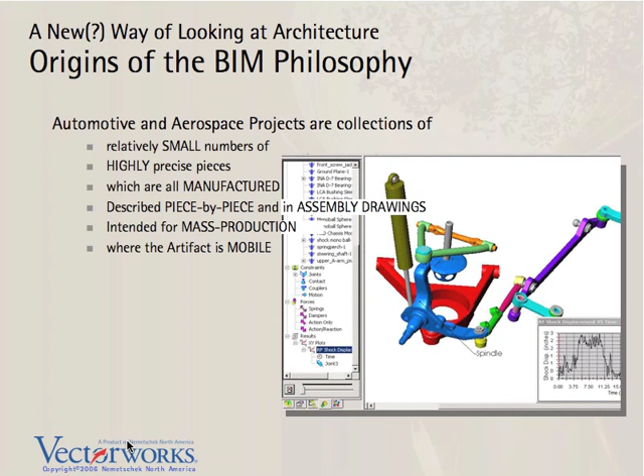Obviously, they're intended to be unique, and they're constructed in a single location, so the artifact is not mobile. The point of use and the point of creation are the same. So how could a building be more different from an automotive or aerospace project? If the entire cultural context is different, it makes sense a little bit that the process could be different.

So why are we adapting these processes to our work? And I'm not saying it's wrong, but I want to raise the question and get you to think about the process a little bit as well.

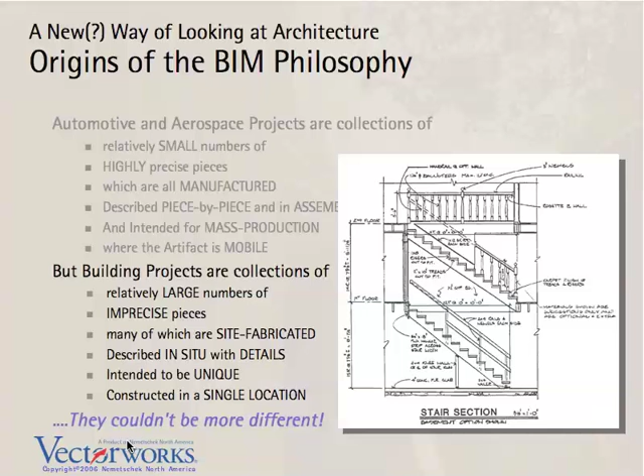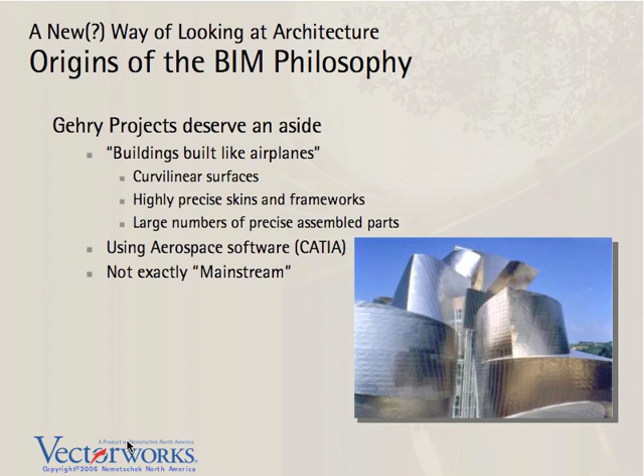I will say that Frank Gehry deserves an aside. In effect, he's got buildings that are built like airplanes with these beautiful, smooth, curvilinear skins, very precise. And so he builds buildings that look like airplanes, and he uses airplane software, which is CATIA, to handle the production and manufacture of his skins, the frameworks that support his skins, and the HVAC that sits inside that framework. It's a beautiful process so far as it goes, but it's not exactly mainstream.

I think it's worth asking the question, can buildings be manufactured? What if we change the process a little bit? This book, Refabricating Architecture, was given to me as a homework assignment by my boss at the end of last year. It's written by Stephen Kieran and Jim Timberlake, both FAIA. Really an interesting book wherein they propose using these automotive and aerospace techniques for buildings, delivering buildings to the site in much bigger pieces with fewer but much more complex joints.

Getting all the trades under one roof, controlling quality, and centralizing the actual location of manufacture - but I don't think it's realistic. Personally, I think their position is weakened by the pieces of architecture and construction they choose to ignore, particularly modern home builders who've taken extraordinary methods to drive costs out of construction. They don't account for the cost of uniqueness or the capital costs of building the actual factories. So I think they ignore home building because of a modernist bias, and ultimately the book is a bit of a polemic. But it's an interesting book, worth reading, and I can highly recommend it.

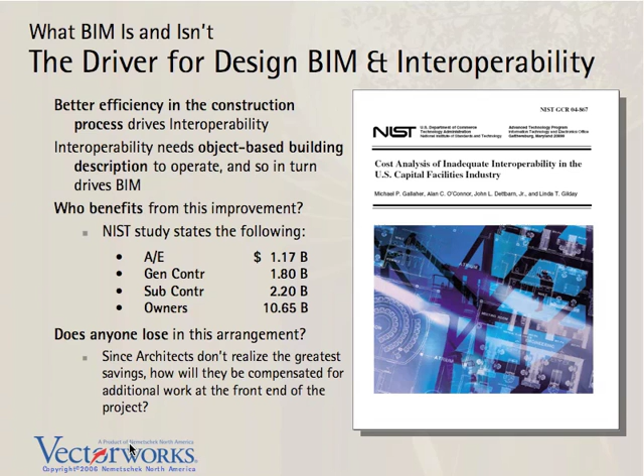Before we go much further, let's talk about a working definition of design BIM. This is that better CAD, that technology that sits on your desktop.

So what is it? Well, projects are developed with an integrated, unified 2D and 3D model. I say 2D and 3D because you can model in 2D every bit as much as you can model in 3D. In fact, you have to have 2D and 3D held together, or integrated.

Think of the way you draw a wall outlet, a duplex outlet. In plan, you just draw it as a circle with two slashes, but in 3D it's a nondescript 2 by 2 by 4 inch box recessed into the wall. If you used strict 3D drawing to represent that in all views, it would be very difficult to interpret what you need to communicate. So 2D as well as 3D are important, and this is a topic we'll come back to.

So the first aspect is this 2D, 3D model. The second aspect is that all the parts of your building are described with objects, drawn as property-bearing objects, not just geometry.

Third aspect is that the various views of this model are going to produce your drawing. So when you make changes to the model, they're automatically reflected in all views, giving you automatic drawing coordination.

That's a nice thing. And the last aspect is that the components, these model objects, possess graphical as well as non-graphical properties. They obviously know something about their quantities, their costs. They might possess information about thermal or acoustic properties, or other scheduling information. Some people call this the 'I' of BIM, the information component. These non-graphical properties are extremely important.

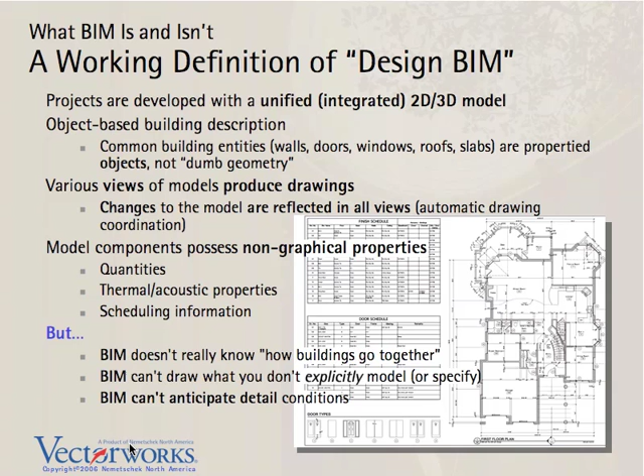It has some advantages. Some things are easier to model than to draw. A spiral staircase is the classic example. In 3D, it's not too complicated - it's a block, and you just step it and rotate it a little bit, and voila, you have a spiral staircase. But if you've ever tried to elevate one in 2D, you know it can be kind of a bear. So it's nice to have this thing you can model easily and have the system draw for you.

And BIM, because of its model-centric nature, does a very good job of coordinating drawings, from the overview to the details, as well as between plan views and vertical views, elevations and interior elevations, etc. In addition, the automatic scheduling is really a boon - it's a natural fit for BIM and all this non-graphical data it's managing in its database for you.

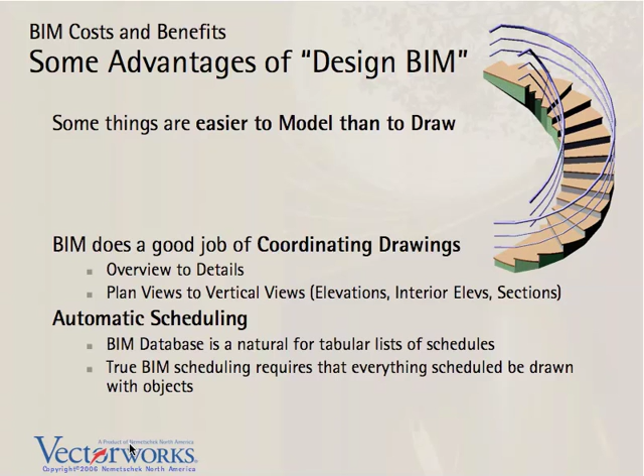So drawing and graphics will still be important to the BIM workflow, and BIM software that requires a separate application can be costly because it can require you to learn and buy a second program. ArchiCAD requires you to also learn PlotMaker. Revit is still recommending that you incorporate AutoCAD for your graphical needs.

It's also worth noting that some BIM software can be very compute intensive, a hog as we say. Sometimes parametric constraints and ubiquitous solids can be relatively sluggish, and it's hard for the software to keep up with the flow of ideas as the designer is drawing and manipulating his model. So evaluate your BIM software on this aspect as well, because they will chew up all the computing power you throw at it, and more.

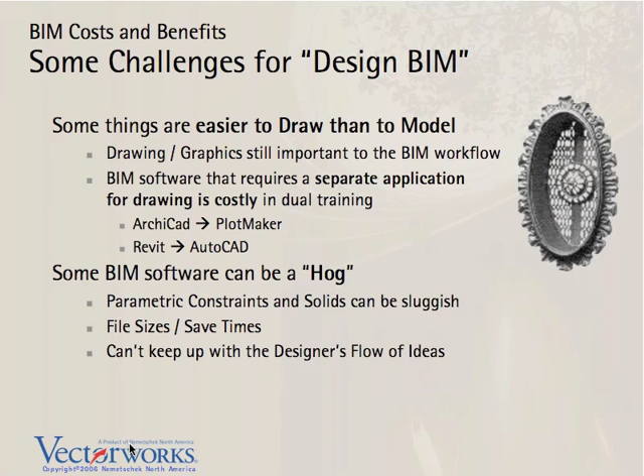I'd like to talk for a minute about BIM and the office culture, and a little bit about the culture of technology in architects' offices in general. If we look at what's happened and where we are today, we can say that CAD has created a two-tier culture at some firms. I call this the virtuoso problem.

If you've ever seen a really good AutoCAD jock, and I know many of your offices are based on AutoCAD, it seems to me like the really fast AutoCAD guys have learned the command line. So when you watch them, they're really quite something to watch. Their left hand is typing away at the keyboard, their right hand is mousing, and the display is zooming in and out. It's really kind of an interesting eye-hand coordination issue.

But the problem is that these AutoCAD jocks add so much value to the firms where they work as electronic pencil pushers that it's difficult to justify sending them out to the site, getting them to do some real construction observation, and getting them to understand how buildings go together. They've sort of created a glass ceiling for themselves because of the value they add as this electronic pencil pusher.

That's a problem in and of itself relating to intern development, but BIM requires architectural and construction knowledge. So how will interns learn how buildings go together? And if I've got to have people who really are truly architects and fewer just drafters, will offices become top-heavy?

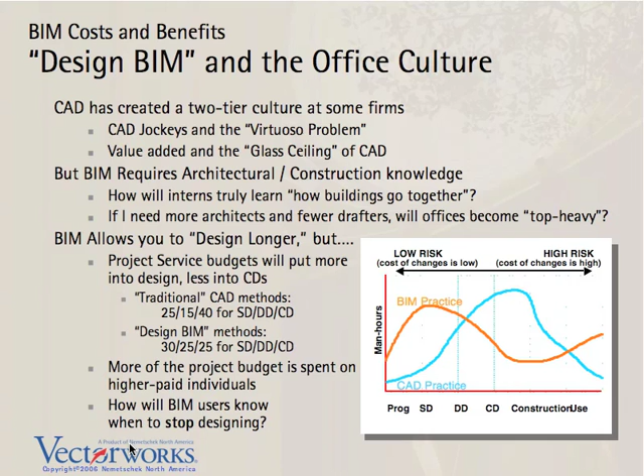So let's look at the actual architectural workflow and see where design BIM fits into it. I like to think of architectural design as a 3-stage process. I think of it as the 3 C's: conceptualize, construct, and communicate.

Conceptualize, or conceptualization, is the sort of intellectual heavy lifting of the project. It's where you actually figure out what the project is going to be. You're thinking, you're sketching, you're going out to the site, you're taking photographs, you're looking at iconography, you're trying to decide what's the imagery you're going to use or base this on. It's where the project really moves from that idea, that good idea Bruce Goff was talking about, into something that becomes a building.

The construct part is, I think, probably more the same for most people. Essentially, we're creating and developing architectural views of the project. You're drawing plans, you're creating a building model, you're extracting views, you might be analyzing and looking at different quantity and cost issues or energy consumption issues. But it's where you've taken that good idea and turned it into an actual building, and at some point you have some form of building model at the center of it all.

Communicate is where you take that and turn it into drawings, and you enhance the drawings. You add graphics, and you dimension and annotate. You lay out your sheets, you write specs. You prepare that architectural reality that you've created, that you've constructed, and you prepare it for talking to the rest of the world. Particularly, you want to refine the view so that the builder can understand what your intent is and build from it. So the 3 C's: conceptualize, construct, communicate.

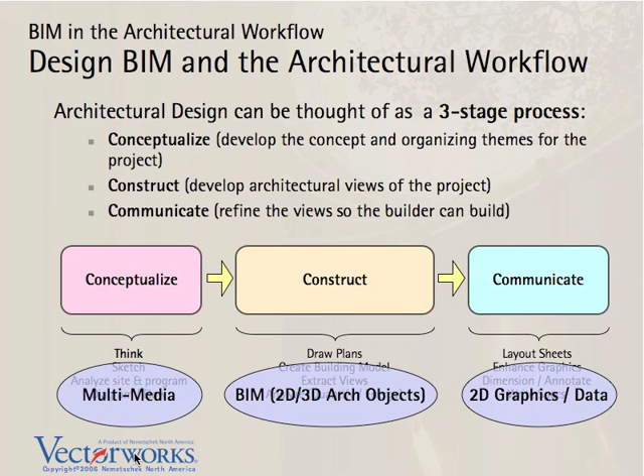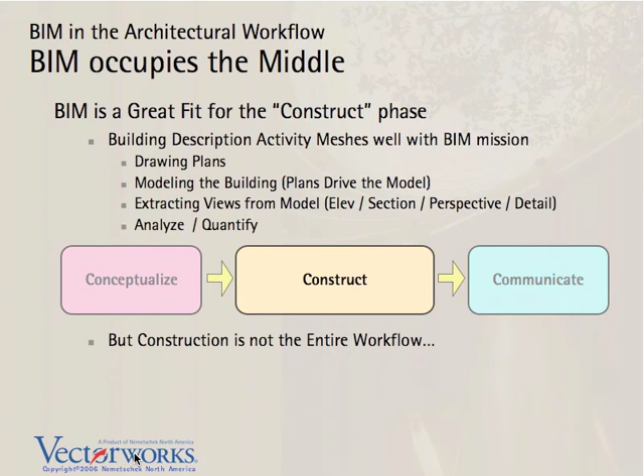If we look ahead at the early parts of the design, one of the things you really want is sketching. Sketching is still important - it's a form of thinking. Sometimes think of sketching as this communication between the designer's conscious and his subconscious mind. And BIM needs the ability to capture these sketches, bring it into the construction phase.

So what you need is two things. You need integrated tools for specialized front-end thinking, like maybe site analysis, space planning kind of tools. But you also need funneling tools that will allow you to capture media from other sources into BIM. This could be images, could be 3D files of various forms, and tools to transform these abstract shapes into actual BIM objects.

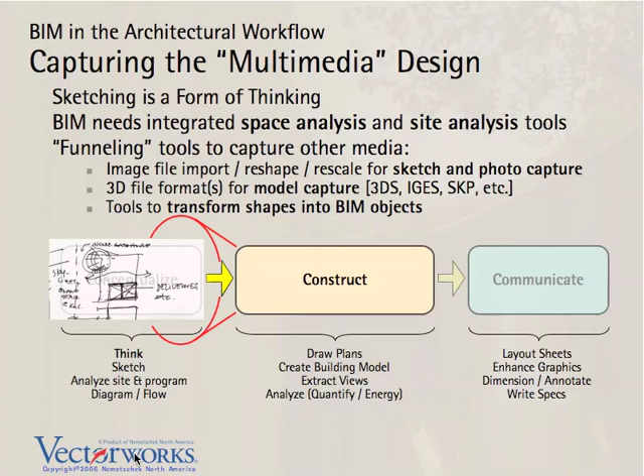At the back end, of course, you need the ability to create readability in your projects. And at the lower left, for example, is an elevational view of a project - perfectly accurate, perfectly correct, and also, frankly, perfectly flat. And you want to be able to enhance those views.

As I often tell people, a lot of the BIM pundits who talk about BIM sometimes say things like, 'finally we're going to be rid of drawings.' With a model at the center of the process, we're going to be rid of drawings, and they act like that's a good thing. We spent 500 years since the Renaissance refining our graphical communications and the agreed upon methods that we use to communicate. And I wonder why the BIM pundits all think that getting rid of drawings is a good idea.

I'm not so sure. I wonder if maybe they got stuck in the back room doing stair details for a little bit too long. But in any case, I like my drawings to read, and I know that this graphical communication is still an integrated and very important part of architecture.

So at the back end, I think we still need the ability to take these views that the BIM creates and add line weight, and begin to do things like texturing and stippling and adding sketchiness if you want to do preliminary type work, and certainly add dimensions and annotations as necessary. There's a lot at the back end that really has to be done on top to get the whole project to read for communication to the client as well as to the contractor.

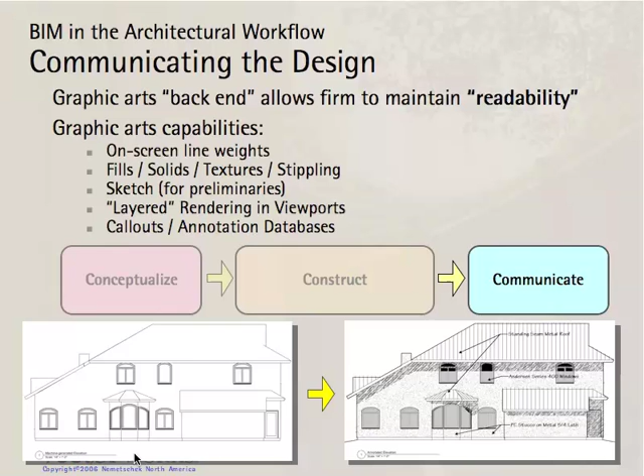Sometimes the vocabulary provided in those BIM objects can be somewhat banal. So BIM should have the ability to take an arbitrary collection of 3D freeform tools and take the geometry that they create, interact them with the standard BIM geometries, and also attach BIM style information, data, or schedule information to a geometric object. That's the Calatrava project there from the 2004 Olympics, the Nations Wall.

It's a wall, but it's not a wall you'd find in any BIM program. And I think that we need to remember that sometimes you need that pure geometry that you can then bring into the BIM world.

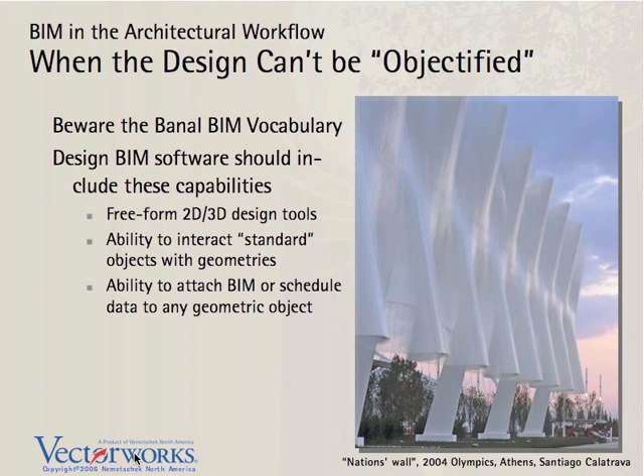So I've given this talk all over the country, and I'm reminded by my marketing people, since they foot the bill, that this needs to have some marketing content. And I tell them, this is really more of an educational talk. And they say, no, Robert, you gotta go out there and sell. So this is my one marketing slide.

I call it Buyer's Guide for BIM. Most of the time I'm talking to medium to small size firms, let's say 20 people offices and smaller. And when I say they need versatility in the software, they begin to nod their heads and agree. So there are really two major overriding issues.

One is that your BIM package should support the entire architectural workflow, the entire 3 C's: conceptualize, construct, and communicate. You want tools to develop that conceptual design, space planning, site modeling, and funneling tools. You want the object-oriented tools in the middle for construction, and the integrated bill of materials that can read that model-based, object-based design. And at the back end, you need good graphic arts capability to handle the communication part. That's one aspect of it.

The second aspect is to look for something that promotes workflow flexibility. In other words, the people in your office have different skills and different experiences, and you should be able to let people just do a drawing. If all they need to be able to do is draw, let them draw. If they want to model, let them model. Give the really advanced guys the ability to do abstract, 3D design.

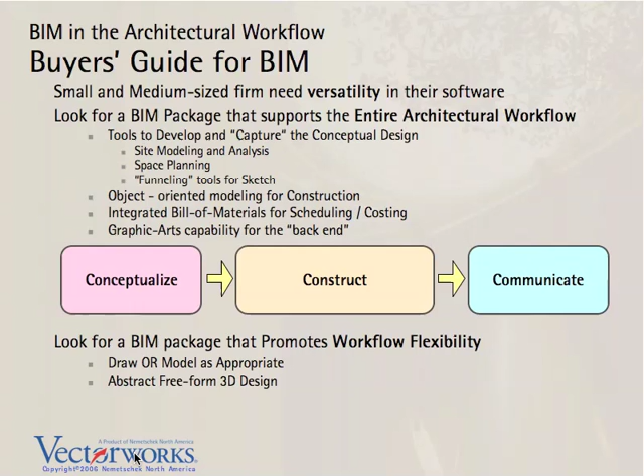In the last section of this talk, I want to prognosticate a little bit and talk about what's going to happen over the course of the next 10 to 15 years in the construction industry. In particular, I want to see how BIM and interoperability will change the workflow.

I want to start by saying that in the short to medium term, by which I mean the 5 to 10 year range, particularly for medium to average size architectural and construction projects, I don't see the role of drawings diminishing. I think physical paper may turn into PDF, we may have electronic viewers, but they better be pretty lightweight and portable so they can be used, and pretty tough so they can be used on the site.

So I think getting rid of paper may be a good thing. I mean, I think we may need the trees to turn carbon dioxide back into oxygen, if you know what I mean. But I don't see drawings per se going away, although they will become electronic.

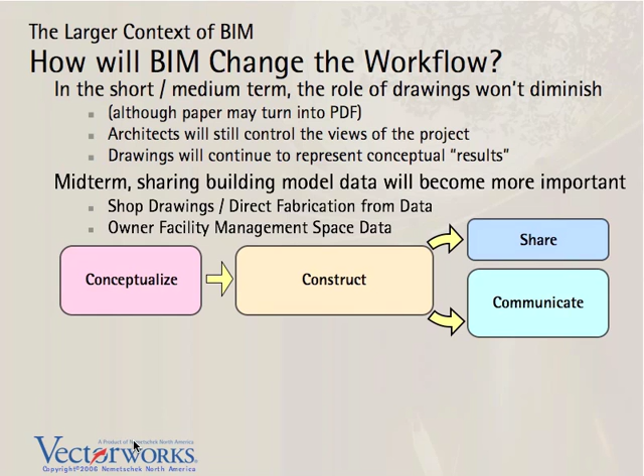Ultimately, sharing is going to take on the lion's share of the whole role for construction. And I say ultimately because we're really not there yet. There are several issues that have to really be worked out. We have to have a lot more wholehearted interoperability support by software vendors, such as my own company.

The BIM software itself will have to become more inferential, such that it can create a more complete model from architectural directions given it by the architect, for it to be as complete as is necessary. And we're also going to have to create model browsers that can communicate as well as our 500-year post-Renaissance drawing language.

One of the contradictions about models is people tend to think that models are easier to understand than drawings are, and I think if they're physical models, they are. But when projected on the screen, models tend to be wireframe, and wireframe models show everything, but can be very difficult to resolve visually. And once you render them to make them easy to resolve visually, then things that are inside them tend to be hidden.

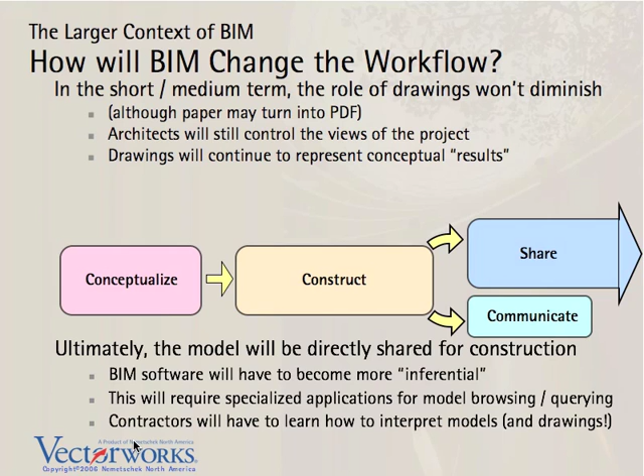So there's this inherent contradiction in showing a model on a screen, and contractors are going to have to learn how to interpret models the way they've learned how to interpret drawings—or some of you may say the way they haven't learned to interpret drawings, because they don't look at them. They're still going to have to look at the models, and there's going to have to be this shared agreement about what constitutes this communication process. But it's going to be happening on a new medium, so we have things to learn all over again.

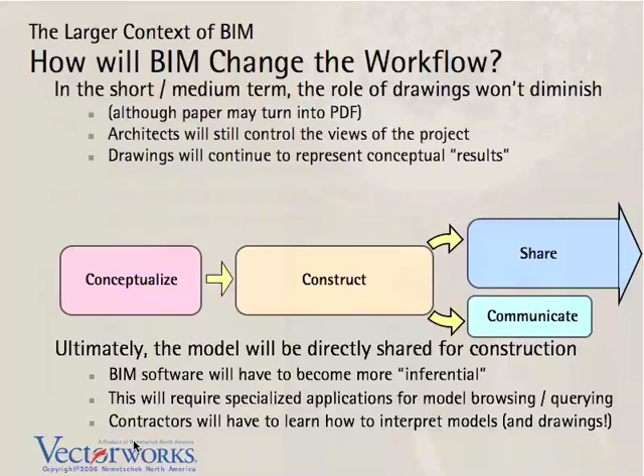Interoperability itself, and the idea of sharing this model, the shared project database, is a really central concept to this new communications in IT for construction. And the likely standard is going to be the IFC file format.

It's been an almost 10-year effort by many different vendors and interested parties in the architecture and construction industries, and it's going to win out because it has the most backing right now, and I think it's a good thing. Today, on a cross-platform basis, different computer systems and different software can now uniformly represent a building to a pretty good level of detail.

So it allows you to describe a building and share that building into and out of the CAD programs. It does not necessarily mean that you're going to be able to universally edit that building description to the same degree of facility as the originating software. But detailed building description is definitely a start, and the ability to interact with the building description is how we're going to move on from this initial building description of the IFC.

But it really is going to help, and it's going to create downstream building analysis, energy analysis, construction bill of materials and costing, HVAC, and other specialized purpose-built applications that can read this IFC model. These are going to be extremely useful and create a much stronger project team.

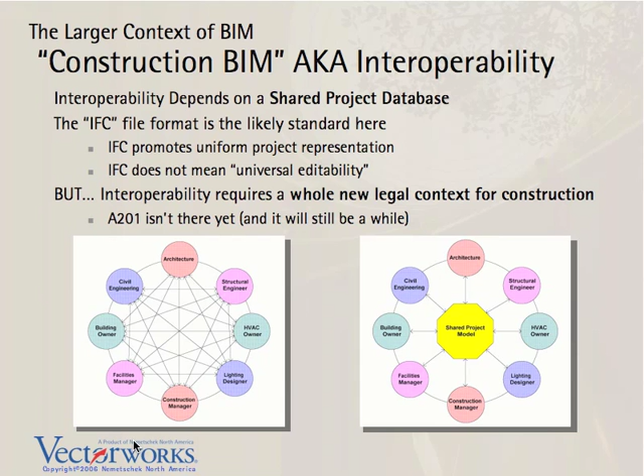So one of the issues that prevent the building information model, this idea of interoperability, from happening—these obstacles are like potholes in the road of good business models. Ideally, we want open and shared communications, but we've still got this idea of risk and reward, particularly for architects, being unbalanced, and we have to find a way to level this out.

One of the issues that I think about a lot is digital rights management—copyright. How do we protect designs? If you want to see what your life is going to be like in 5 or 10 years, look at the music industry today. There's Bruce Goff again, comparing the music industry to architecture.

The artists in the music industry today are dealing with copyright and protection issues, and we will be dealing with them as well, as our creative endeavors become totally digitized.

As I said earlier, the general conditions are going to have to change to support this, and clearly the liability insurance industry is going to have to support interoperability. I think they look at it as a two-edged sword right now. They say yes, this can reduce errors in the industry and therefore reduce everybody's risk, and it's a good thing. But the architect has to learn how to manage this new setting, and learn how to create expectations that's very different from the way architecture is practiced today. Ultimately, it means a change in the architect's practice model.

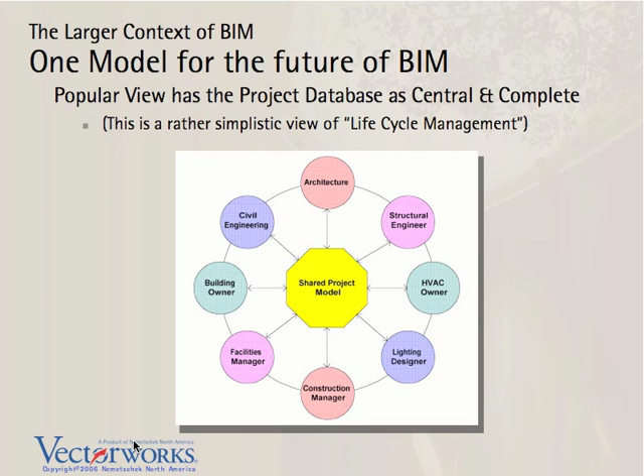I'll finish this talk up by looking at what I think of as one model for the future of BIM and interoperability. I've always looked at this shared project model in the center of things as kind of a simplistic idea of the project database, of life cycle management for the project, because projects don't stay the same. They change, and the needs of the project during construction and commissioning are very different from its needs 5 years into its lifetime, or 30 years, or 45 years into its lifetime. So this idea of a centralized database is a little too static, and simplistic. So let's look at another possible model.

Possibly these different players could even be paying for the rights to access the shared project model to the architect, which would be a downstream form of revenue that would give him more justification for putting the effort in up front. I think this is one possible model, although there are many possible models for the way architects might deliver their data and the way the project team might sort itself out in the future.

But I'll leave you with the thought that I think owners really don't want to wrest management away from architects. I think they really don't want documents. They really want answers when they call you up and ask you a question or ask you for a document. I think it's possible that this idea of a shared project model, or the whole idea of BIM, may be a way for us as design professionals to deliver answers to owners. And maybe we can even move into the management as well as the design of our projects.